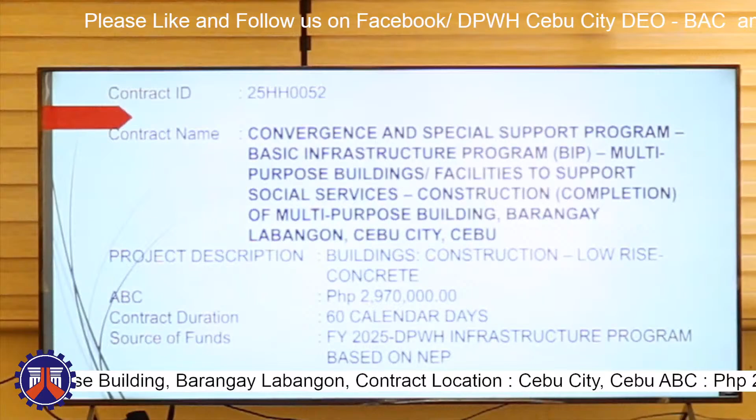Good morning everyone, I'm here to discuss the MPB projects. For the first one, we have contract ID 25HH0052 with contract name Convergence and Special Support Program, Basic Infrastructure Program, Multipurpose Buildings, Facilities to Support Social Services, Construction/Completion of Multipurpose Building, Barangay Labangon, Cebu City, Cebu. Project description: buildings construction, low-rise concrete. Approved budget for contract is 2,970,000 with contract duration of 60 calendar days. Source of funds is FY 2025 DPWH infrastructure program based on NEP.

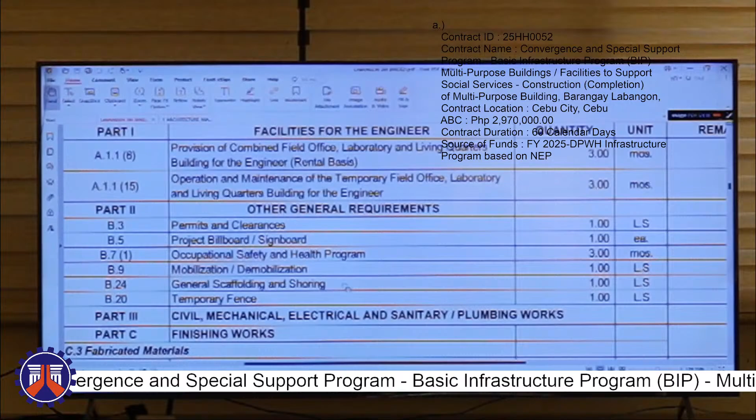For the main scope of works: facilities for the engineers, A1.1 (8) provision of combined field office, A1.15 operation and maintenance of the temporary field office. For part 2, other general requirements: B3 permits and clearances, B5 project billboard/signboard, B7 occupational safety and health program, B9 mobilization and demobilization, B24 general scaffolding and shoring, B20 temporary fence. For the main scope of works, we have the architectural scope.

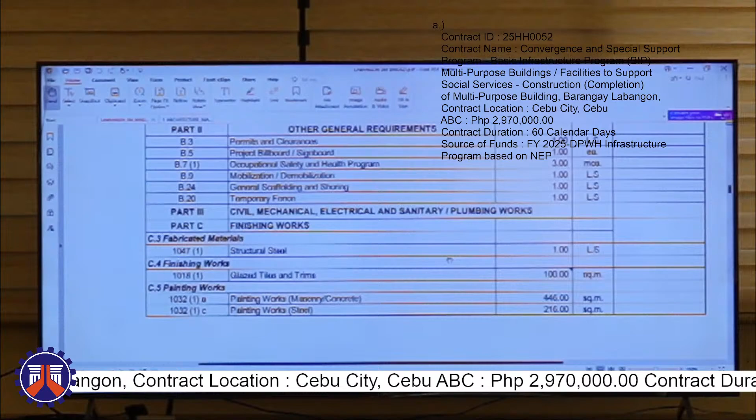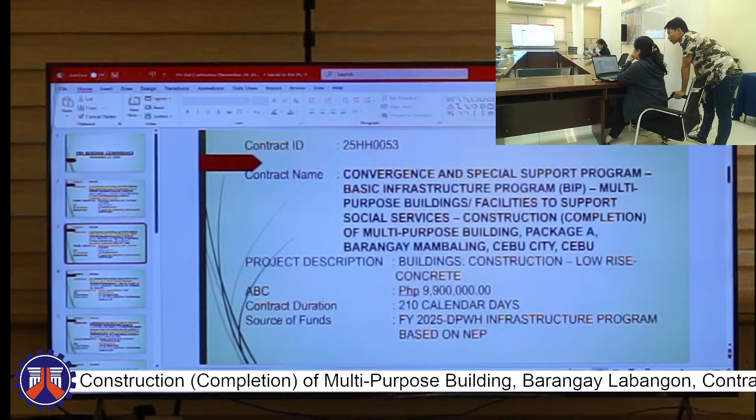That's all for Barangay Labangon. Next is contract ID 25HH0053 with contract name Convergence and Special Support Program, Basic Infrastructure Program, Multipurpose Buildings, Facilities to Support Social Services, Construction, Completion of Multipurpose Building Package A, Barangay Mambaling, Cebu City, Cebu. Project description: buildings, construction, low-rise concrete. Approved budget for contract is 9.9 million. Contract duration is 210 calendar days and source of funds is FY 2025 DPWH infrastructure program based on NEP.

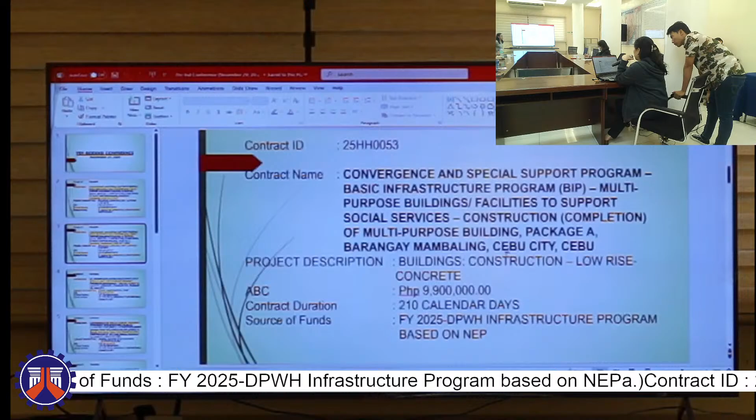For the target scope of work, this project aims to construct the multipurpose building at Barangay Mambaling, Cebu City. The scope of works consists of structural excavation of footings, columns and beams, and structural concreting of footings, columns and beams. This also includes cement plastering of columns and beams, piping of sanitary sewer line, cold water line pipes, and electrical conduits and rough-ins.

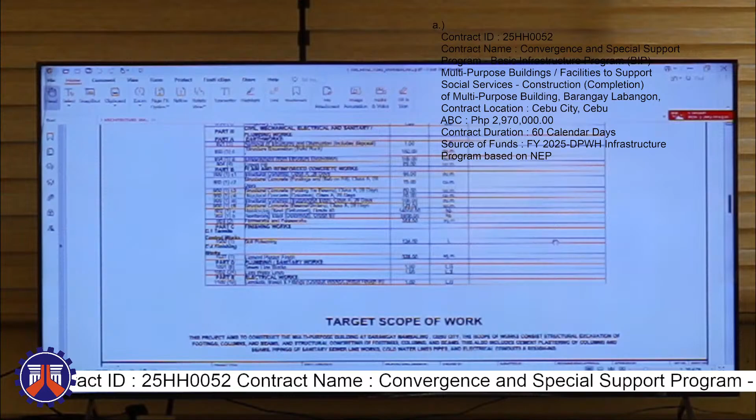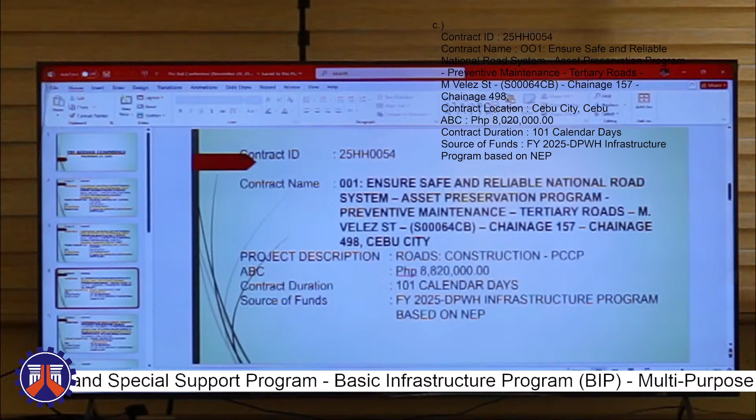25HH0054, contract name 001, ensures safe and reliable national road system, asset preservation program, preventive maintenance, tertiary roads, M. Velez Street, S00064CB, chainage 157 to chainage 498, Cebu City. Project description: roads construction, PCCP. The approved budget for the contract is 8,820,000 pesos, with a contract duration of 101 calendar days, and source of funds being FY 2025 DPWH infrastructure program based on NEP.

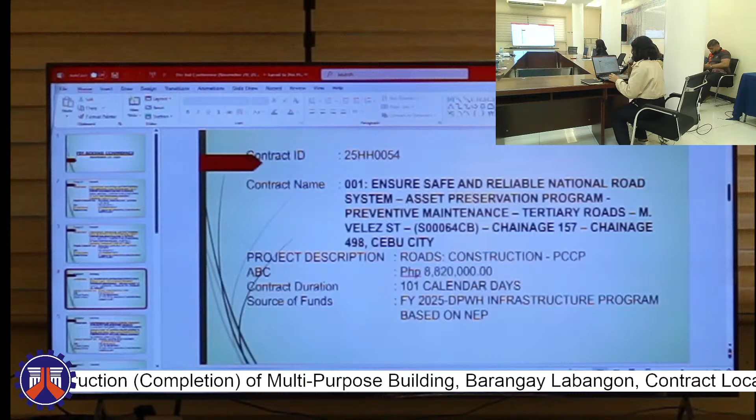Here's our initial plan with the station limit starting from 0+157 ending at station 0+497, with a net length of 340 meters. And here is our location for the project.

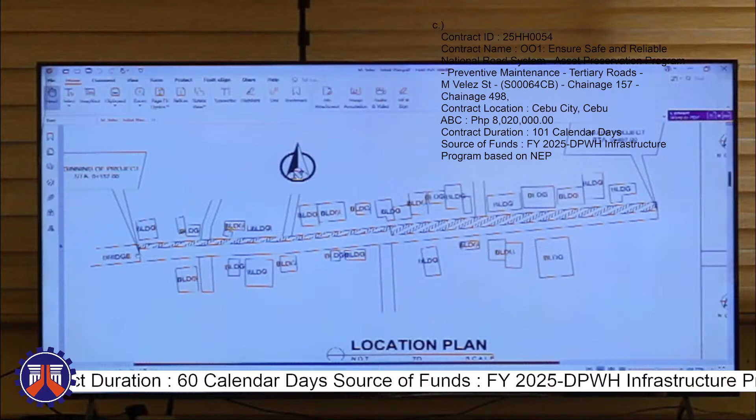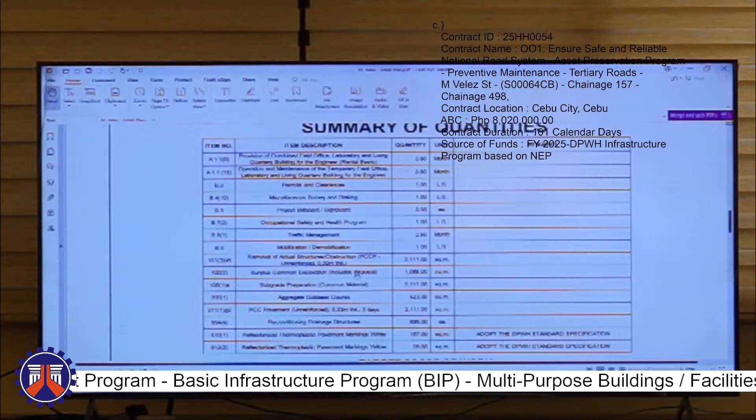Next, we have here the summary of quantities. Basically, for the main scope of works for the project, it includes the removal of actual structures or obstruction, PCCP with 0.33 meters thick, as well as surplus common excavation,

including disposal, subgrade preparation for common material, aggregate sub-base course, PCCP unreinforced 0.33 thick, with a curing time of 3 days, and then there's also reconditioning of the drainage structures for both sides of the whole length, as well as reflectorized thermoplastic pavement markings, both white and yellow.

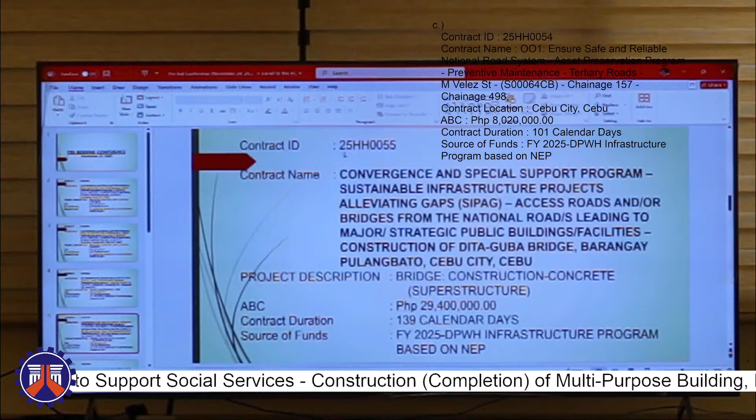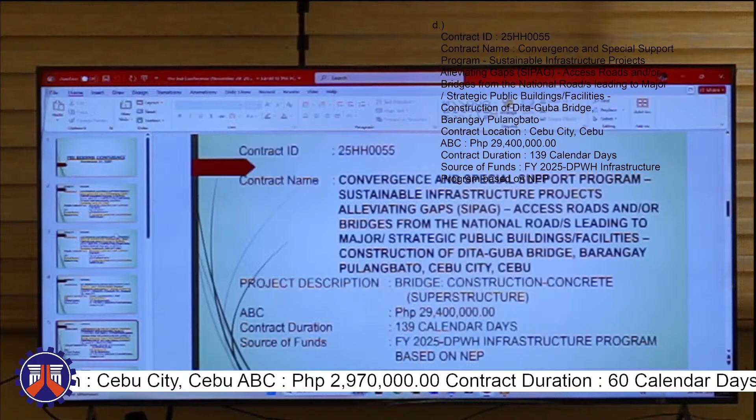Good morning, I'm PJ Hara. I am going to be discussing contract ID 25HH0055, with the contract name of Convergence and Special Support Program, Sustainable Infrastructure Projects Alleviating Gaps, Access Roads and or Bridges from the National Roads leading to major strategic public buildings, facilities, construction of Dita Guba Bridge, Barangay Pulangbato in Cebu City, Cebu. The project description is bridge construction, concrete superstructure. Its approved budget of contract is 29,400,000, its contract duration is 139 calendar days, and its source of funds is fiscal year 2025 DPWH infrastructure program based on NEP.

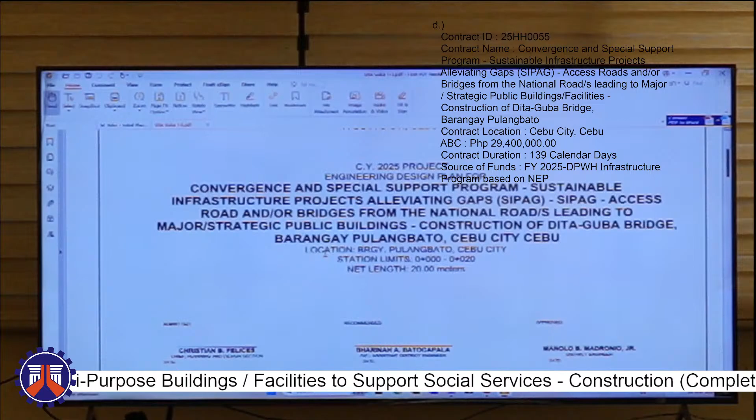The net length of the bridge is 20 meters, and it is located near the basketball court of Dita-Guba.

And its major scope of work are the following: the removal of structures and obstructions, the bridge excavation and embankment, and the superstructure, which is the main bridge and the deck.

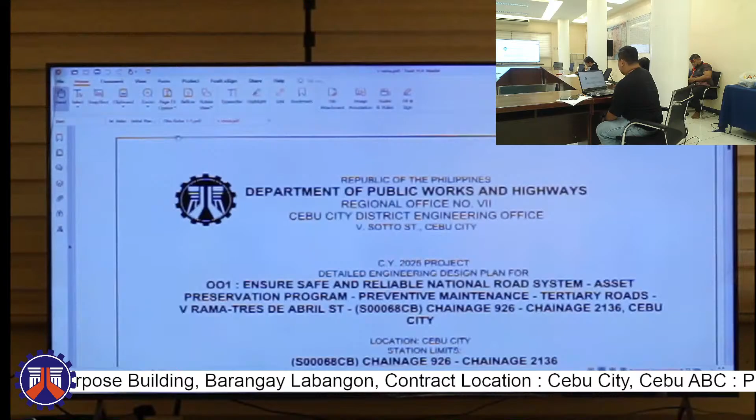Good morning, so I'll be presenting contract ID 25HH0056, with the contract name 001, ensure safe and reliable national road system, asset preservation program, preventive maintenance, tertiary roads, V. Rama to Tres de Abril with S00068CB, chainage 926 to chainage 2136. Project description: construction PCCP, and an ABC of 31.36 million, and contract duration of 193 days.

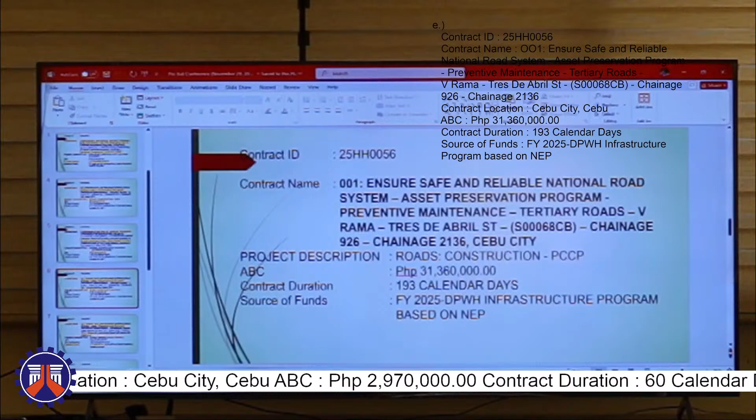As for the plan, the station limits is at chainage 926 to chainage 2136, with a net length of 1,210 meters.

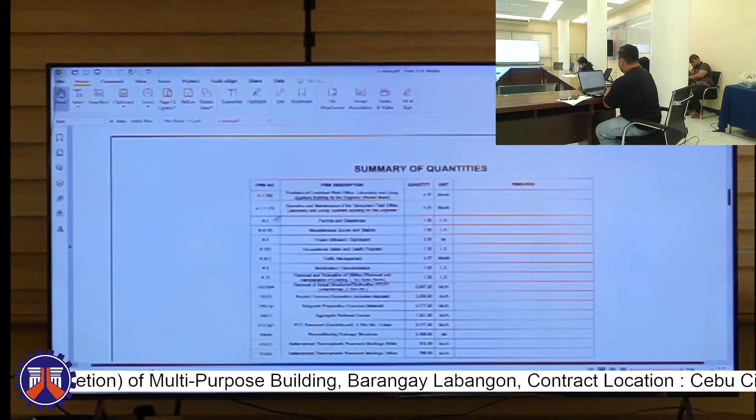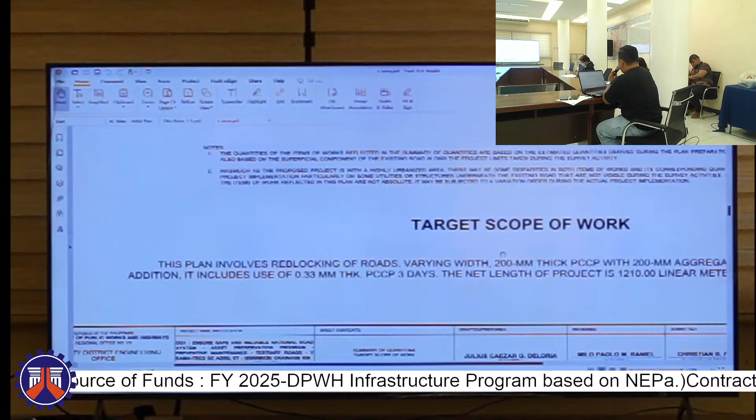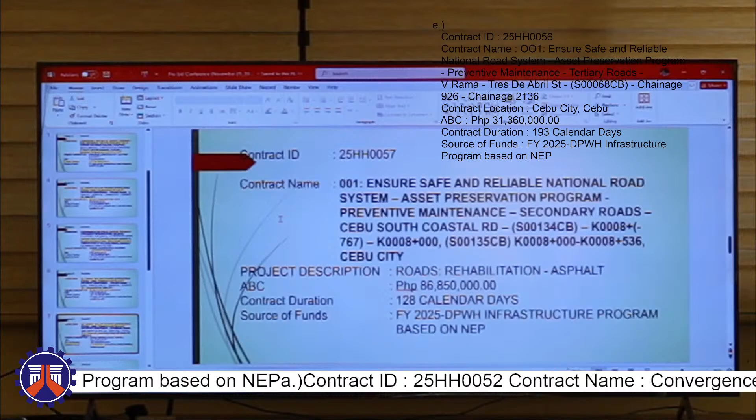Morning, I'm here to discuss our next project with contract ID 25HH0057, contract name 001, Ensure Safe and Reliable National Road System, Asset Preservation Program, Preventive Maintenance, Secondary Roads, Cebu South Coastal Road, with section ID S00134CB from station K0008 plus minus 767 to K0008 plus 000. The next section is S00135CB, K008 plus 000 to K0008 plus 536, Cebu City, with the project description of roads, rehabilitation, asphalt.

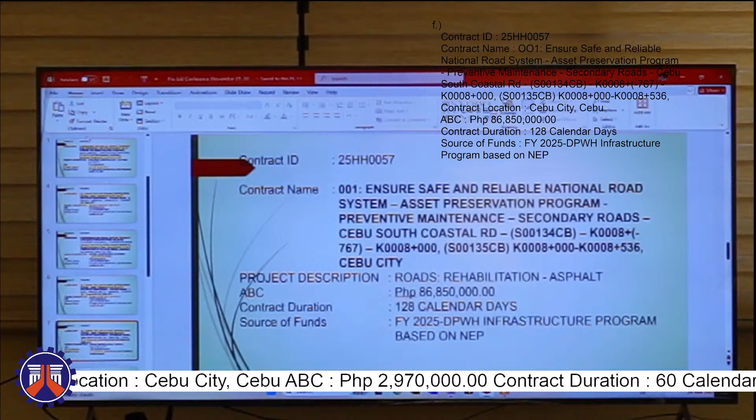Our ABC is 86,850,000 with a contract duration of 128 calendar days. The source of fund is FY 2025 DPWH infrastructure program based on NEP.

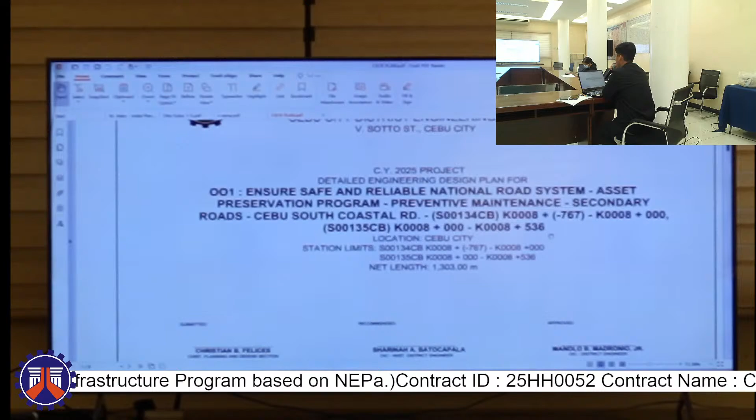Our project location is at SRP near the SMC side. Station limits here: first, section ID S00134CB is southbound from kilometer 8 minus 767 to kilometer 8. The next section ID is S00135CB, northbound going to Viaduct, from kilometer 8 to kilometer 8 plus 536, with a net length of 1,303 meters.

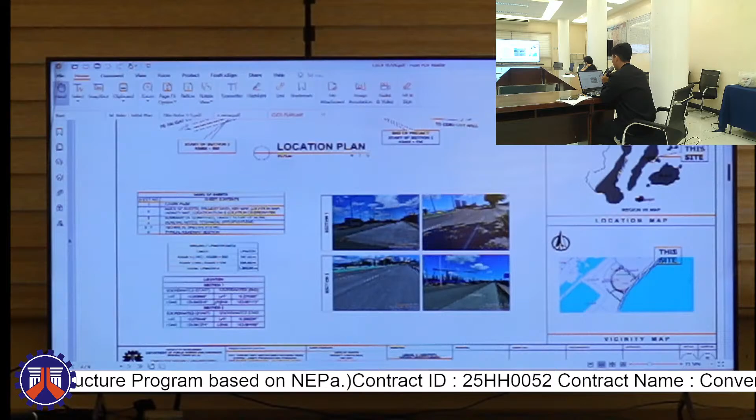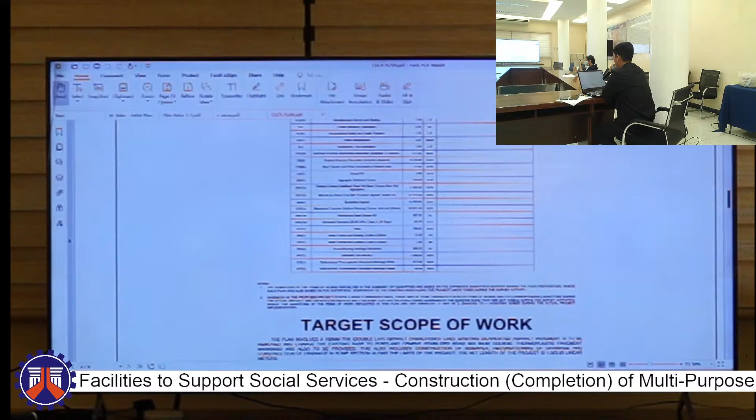Our target scope of work involves a 100mm thick double lay asphalt overlay, hot laid. Existing dilapidated asphalt pavement is to be removed and changed. The existing base to Portland cement stabilized road mix base course. Thermoplastic pavement markings are also to be provided. This also includes construction of sidewalk, reconditioning of drainage on both sides, and construction of drainage in some sections along the limits of the project. The net length of the project is 1,303 meters.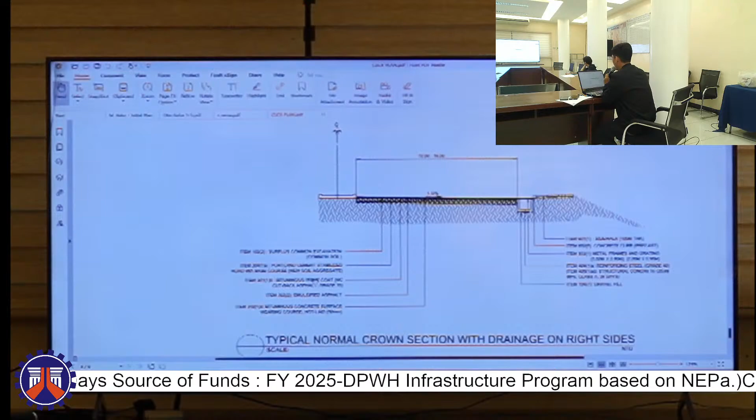We have our excavation, item 102, then Portland cement stabilized road mix base course, then bituminous prime coat, MC cutback asphalt grade 70, then emulsified asphalt, then bituminous concrete surface wearing course hot laid. On the right side, we have our sidewalk, concrete curb precast, metal frames and grating for our drainage cover. Item 404 and 405, reinforcing steel and structural concrete for our drainage, and also gravel fill.

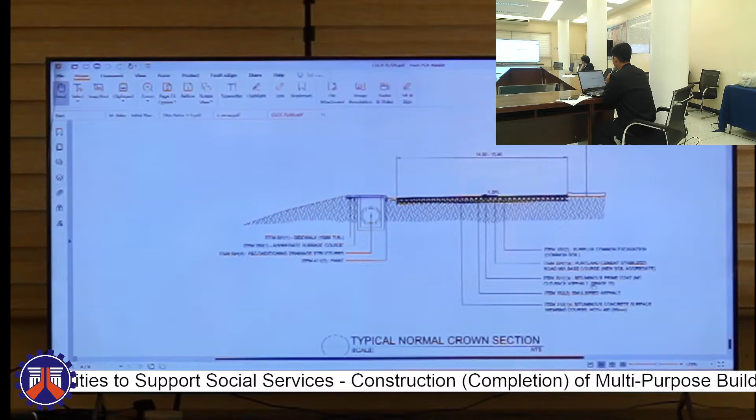This one is the typical section for our 135CB going to Viaduct. We still have the surplus common excavation, Portland cement stabilized road mix base course, bituminous prime coat, MC cutback asphalt grade 70, emulsified asphalt, bituminous concrete surface wearing course hot laid. Also on the left side, we have the sidewalk, aggregate sub-base course, conditional drainage, and painting of curb. That's all.

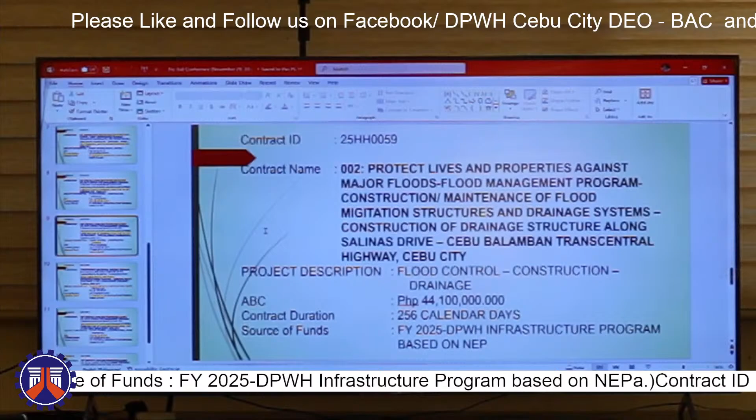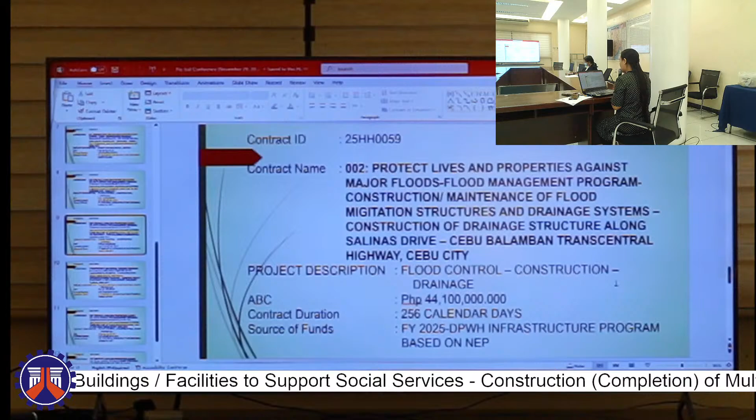For the next project, contract ID 25HH0059-002, Protect Lives and Properties Against Major Floods, Flood Management Program, construction and maintenance of flood mitigation structures and drainage systems, construction of drainage structure along Salinas Drive, Cebu Balamban Trans-Central Highway, Cebu City. Project description: flood control construction, drainage. With an ABC amount of 44,100,000, contract duration 256 calendar days, source of fund FY 2025 DPWH infrastructure program based on NEP.

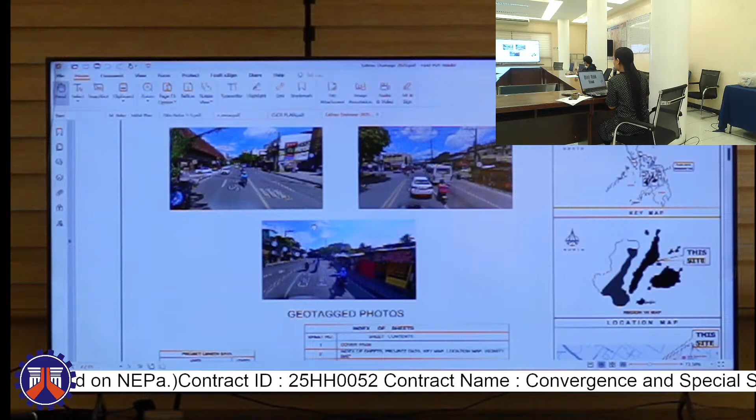This project is located along Salinas Drive, going to Cebu Balamban Trans-Central Highway, and crosses at the junctions of Gorordo and Salinas Extension. This project is a continuation of our 2018 drainage project along Salinas Drive. As you can see in the picture, there is the last manhole of our 2018 project. We will connect there, going to junctions of Gorordo Avenue, and turn to Cebu Trans-Central Highway.

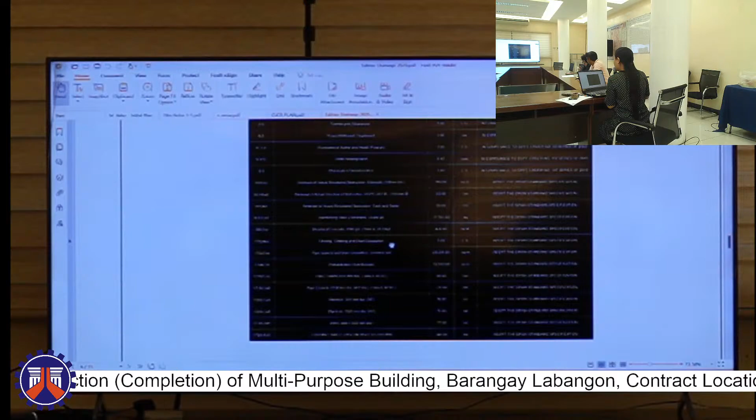The main scope of work of this project is construction of 60 inch RCPC drainage type 2, with a manhole every 20 meters, with cross drainage of 36 inch RCPC diameter. We also have removal of actual structures of obstruction like sidewalk, existing RCPC, curb and gutter. We also provide shoring, cribbing, and drain excavation for this project. That's the main scope of work of this project.

So that's all for this project.

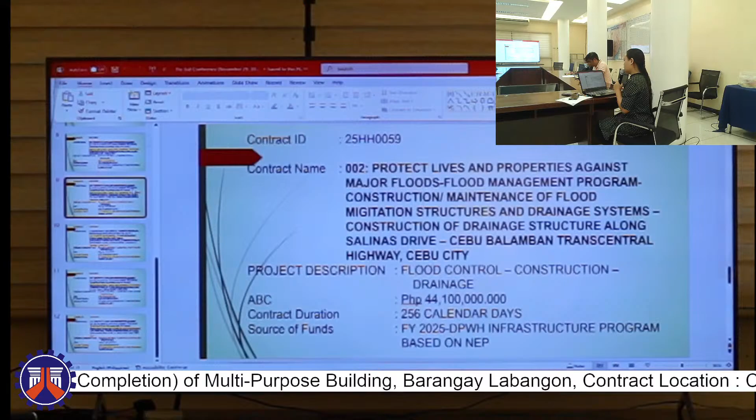Okay, copy, sir. So for the next project, Engineer Celestius will discuss.

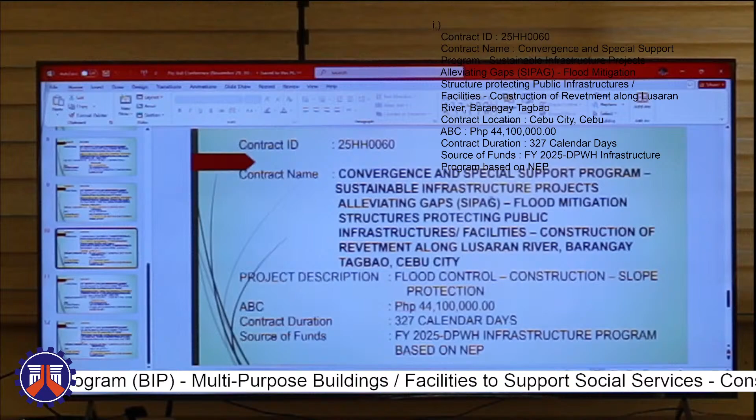Good morning, everyone. I am here to discuss contract ID 25HH0060, contract name Convergence and Special Support Program, Sustainable Infrastructure Projects Alleviating Gaps, Flood Mitigation Structures Protecting Public Infrastructures or Facilities, Construction of Revetment along Lusaran River, Barangay Tagbao, Cebu City. Project description: flood control construction, slope protection. Approved budget for the contract of 44,100,000 pesos, with contract duration 327 calendar days, and source of funds FY 2025 DPWH infrastructure program based on NEP.

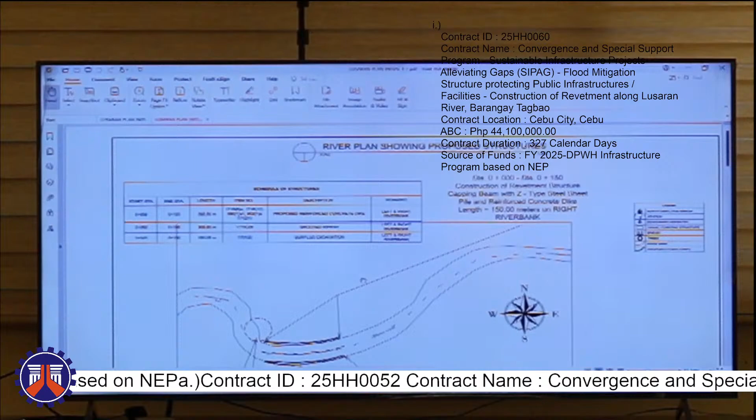This project is located along Lusaran River at Barangay Tagbao with station limits Station 0 to Station 0+150, with total length of 300 meters, with 150 meters on right river bank and 150 meters on left river bank. This project is situated along Lusaran River with a major scope of work of construction of revetment structure with a capping beam, Z-type steel sheet pile, and reinforced concrete dike composed of concrete slope protection on both left and right river bank.

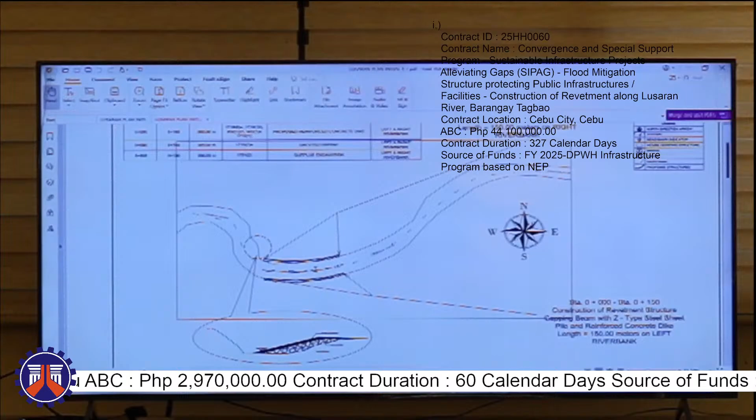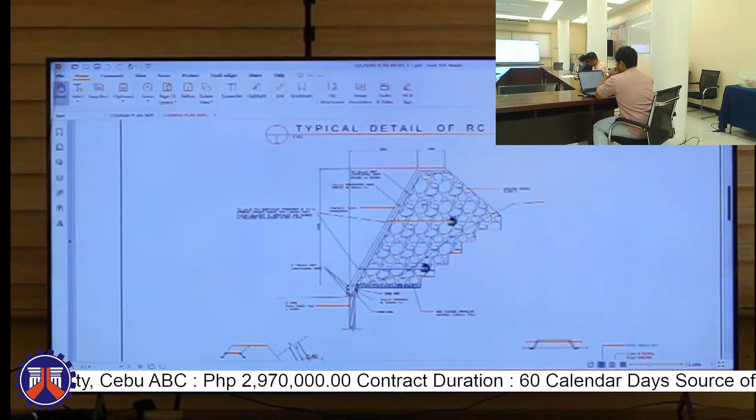For the details, it has a steel sheet pile with pile capping and 5-meter height reinforced concrete dike, with grouted riprap class A inside. Here are the typical details for the RC dike and also the detail for the steel sheet pile cap. This is also the details for the Z-type steel sheet pile. And that's it for this project.

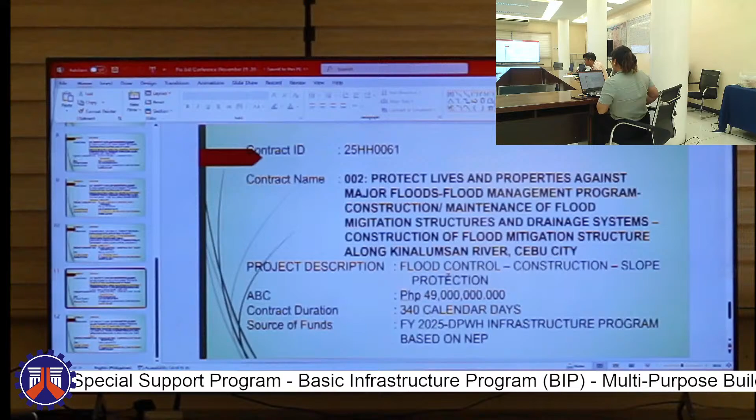Good morning, everyone. So for this project with contract ID 25HH0061, contract name 002, Protect Lives and Properties Against Major Floods, Flood Management Program, Construction Maintenance of Flood Mitigation Structures and Drainage Systems, Construction of Flood Mitigation Structure along Kinalumsan River, Cebu City, with a project description of flood control construction slope protection, with an ABC amount of 49 million and 340 calendar days, source of funds FY 2025 DPWH infrastructure program based on NEP.

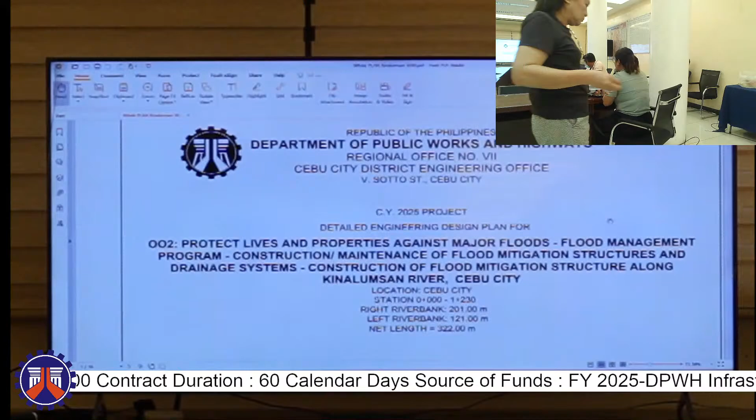So for this project, the location is along Kinalumsan River, Cebu City, with a net length of 322 meters. This project is composed of 2 barangays, Barangay Buhisan and Barangay Punta. Coordinates are provided for the exact location.

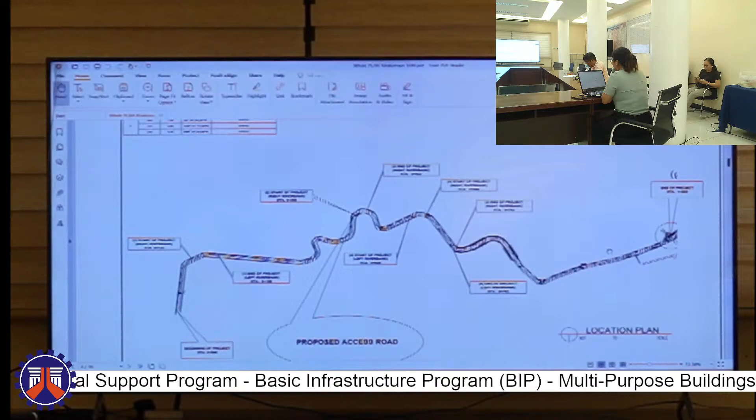This project has 4 sections. Section 1 and 2 are under Barangay Punta, then sections 3 and 4 are under Barangay Buhisan. For sections 1 and 2, the landmark is near Don Bosco along Buhisan Road. Barangay Buhisan is a continuation of the 2024 project.

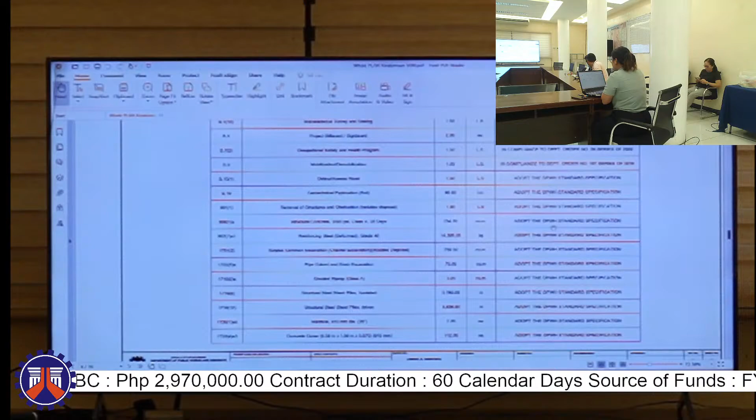The major scope of work of this project includes structural concrete, reinforcing steel, pipe culvert and drain excavation, grouted riprap, structural steel sheet piles, furnished and driven manhole, and concrete cover. The detailed typical cross-section is shown here.

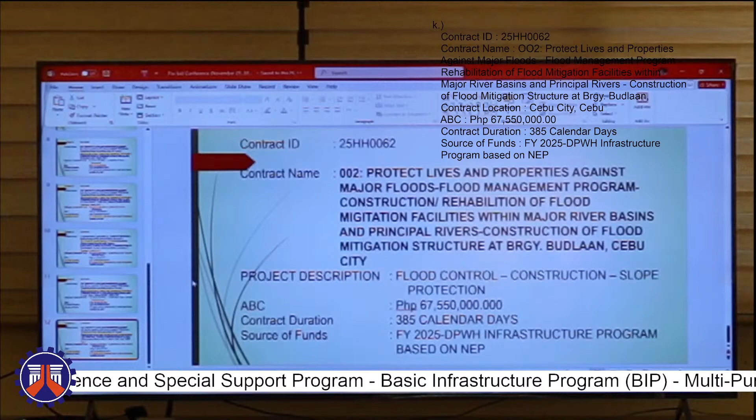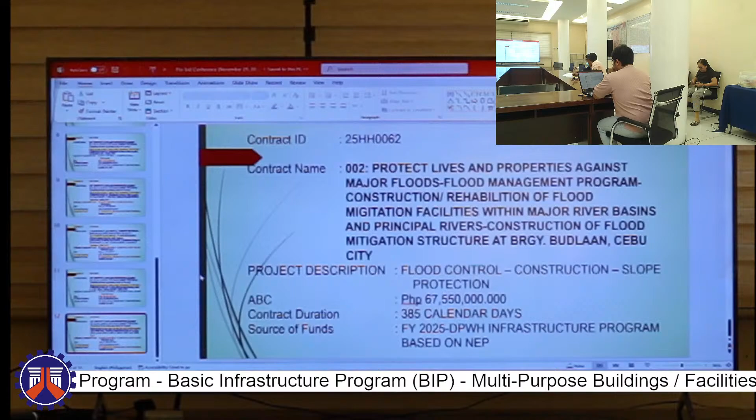For the contract ID 25HH0062 with contract name 002, Protect Lives and Properties Against Major Floods, Flood Management Program, construction or rehabilitation of flood mitigation facilities within major rivers, river basins, and principal rivers, construction of flood mitigation structure at Barangay Budlaan, Cebu City, with project description flood control construction of slope protection, with approved budget for the contract of 67,550,000, with contract duration 385 calendar days, and source of funds FY 2025 DPWH infrastructure program based on NEP.

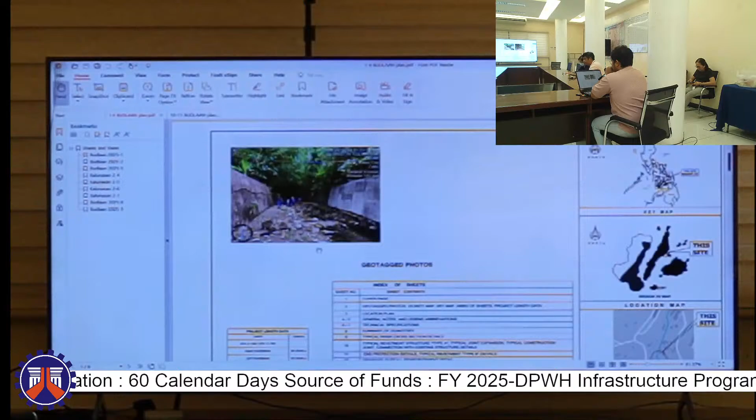For this project, it is located at Barangay Budlaan with station limits station 0 to station 600, and with a length for the right river bank of 381.5 meters and 321.5 meters for the left river bank, with a total length of 703 meters. Here's a geotag photo for reference as well as for the exact location of the project.

Here's also the location map showing the location of the project, and here's the general notes as well as the technical specifications for the items involved in the project.

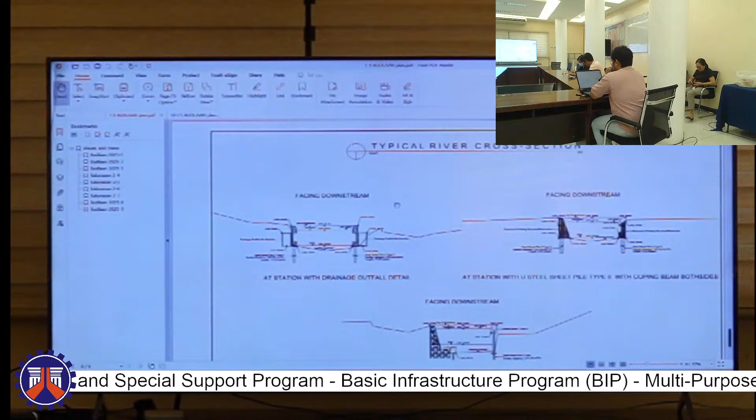For this project, the major scope of work is, this was actually our project way back 2019, but some of the structures were damaged, and this will serve as replacement for those damaged structures, as well as construction of revetments. These are the typical sections with steel sheet pile type 2 with coping beam for both riverbanks.

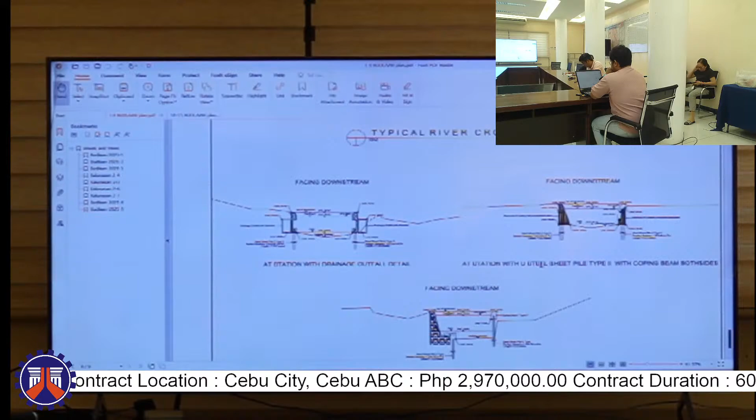There's also type A and type B revetment details for some sections. And that's it for this project.

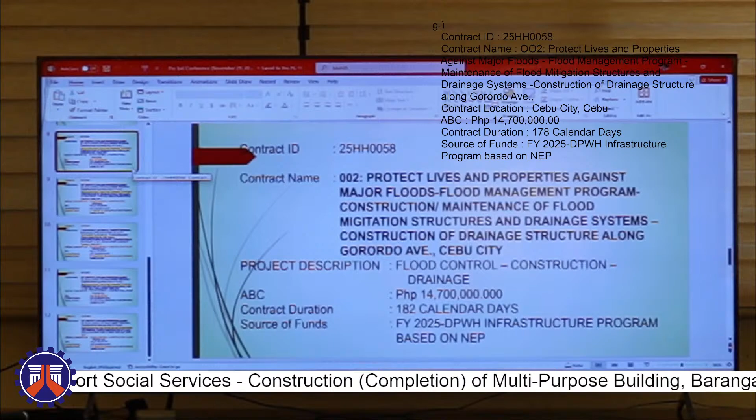Good morning, everyone. Next project is designated with a contract ID of 25HH0058 with contract name of 002, Protect Lives and Properties Against Major Floods, Flood Management Program, construction, maintenance of flood mitigation structures and drainage systems, construction of drainage structure along Gorordo Avenue, Cebu City. Project description is flood control construction of drainage with an ABC amount of 14,700,000 pesos. Contract duration is 182 calendar days, and source of funds is FY 2025 DPWH infrastructure program based on NEP.

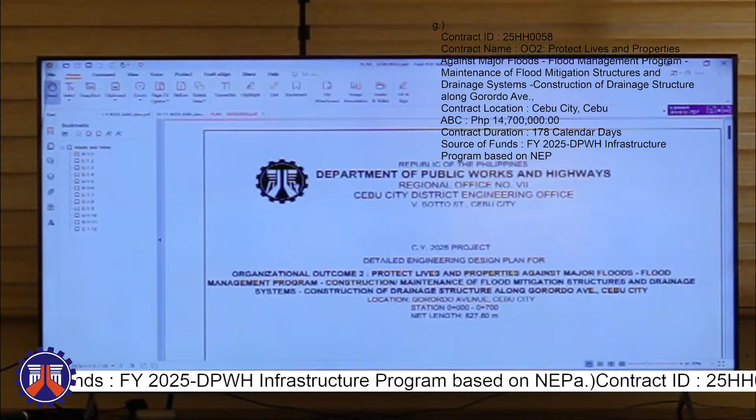The project is located specifically at Gorordo Avenue, Cebu City, with stations 000 to 700, with a net length of 627.80 meters. The project will start at the junction around Trans Central Highway with the station 00 up to 670.

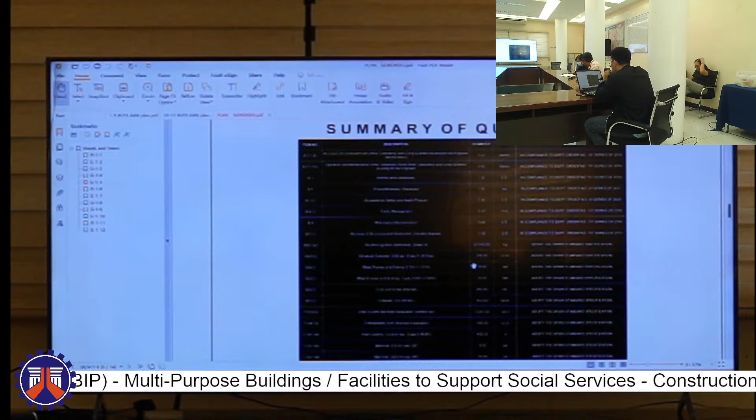concrete with 3,000 PSI Class A, 28 days, metal frames and grating of 0.7 by 1.57 meters, metal frames, curb and gutter, sidewalk, pipe culverts, embankments, manholes of 910 millimeter diameter and 1,220 mm diameter. We also have inlets of type 1,220 millimeter diameter and a concrete cover here as follows.

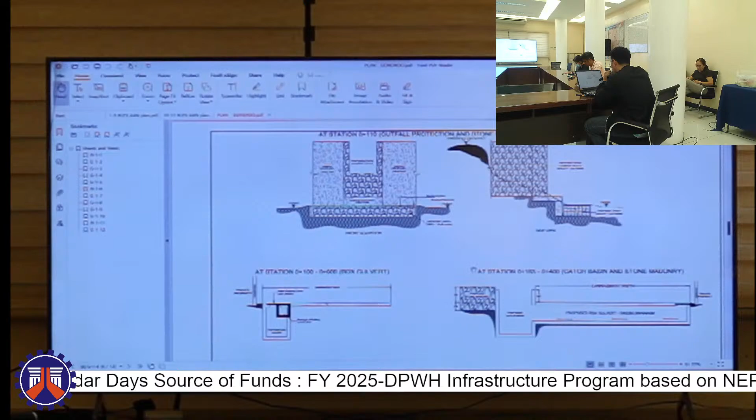Here is the typical drainage section details shown to you, front elevations and sides. Stations 100 to 600 show the box culvert, and 165 to 400 is the catch basins and stone masonry.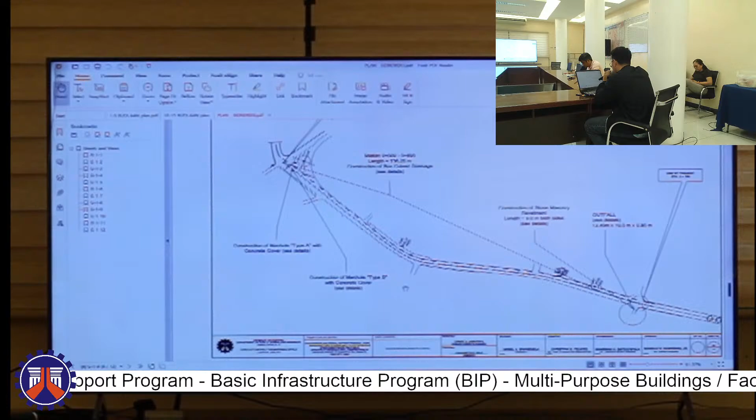Here is the construction of manhole type A with concrete cover and type B also, and the details. Here are the other details for outfalls and scouring protections, stone masonry, open canals, and other items such as box culverts, bar bending diagrams, sections with steel grating covers, and other elevations. That will be all. Thank you.

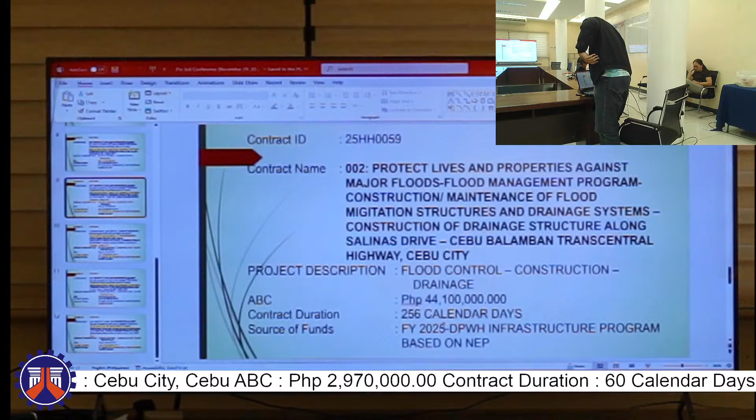Okay, do we have concerns from our online viewers? Okay, I think none, so I will now turn over to Engineer Andrew for some reminders.